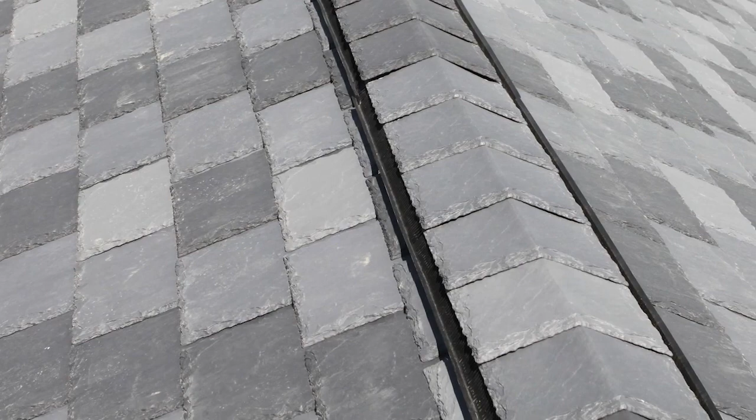For the contractor and installer, Aledora Slate has been designed and engineered to assure a fast and easy installation. By following these simple steps, you will provide a finished product that's not only beautiful, but also provides the home with the most durable protection available.

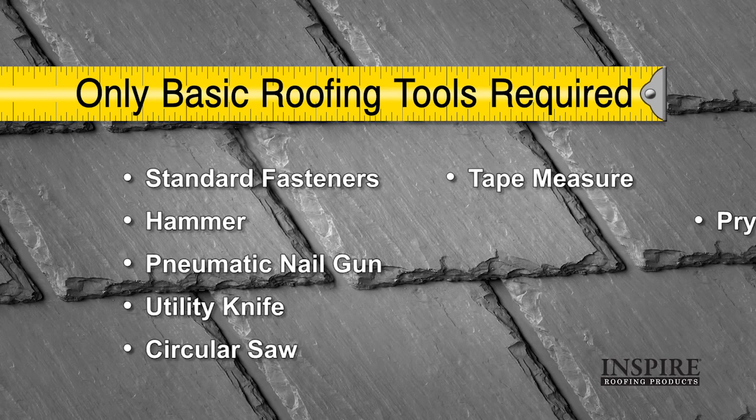Aledora Slate Roofing is installed using traditional roofing methods and tools. The slates can be fastened with hammer and nails or with pneumatic nail guns. They can be cut with a utility knife or a standard circular saw. You'll also need a tape measure, a pry bar, tin snips, and a chalk line. Note, only use blue chalk, never use red chalk.

Aledora Slate can be installed with exposures ranging from 6 inches to 8 inches on roof pitches of 5/12 and greater. For pitches of 3/12 to 5/12, 7 inches is the maximum exposure allowed.

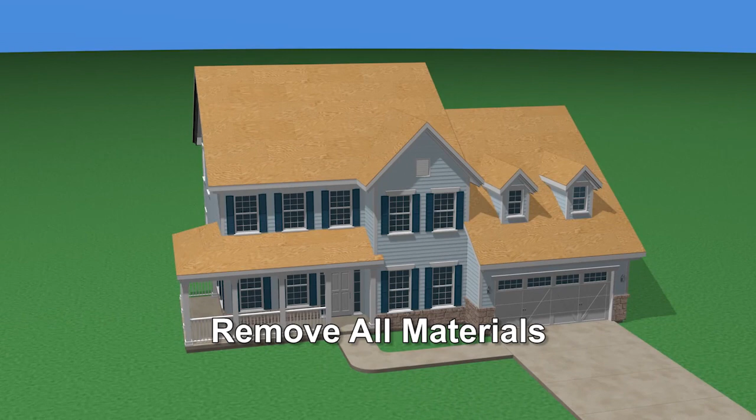Preparation. The roof substrate should be prepared as in any roofing job. Make sure that all previous roofing materials, if any, are removed down to the substrate. The area must be flat, smooth, sound, and clean.

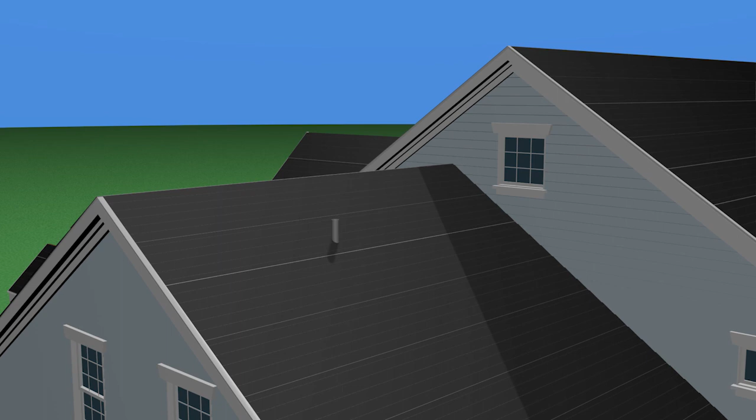Examine the roof sheathing, verifying that sheathing joints are supported by framing and blocking or by metal clips. Verify that the substrate is properly sloped for drainage, and proper provisions have been made for flashings and roof penetrations. All flashings and penetrations must be in place before installation of the slates.

The slates must be properly stored in their original packaging and kept in a storage facility where the temperature never drops below 20 degrees Fahrenheit. The slates must be properly stored on the job site.

Use protective coverage over all pallets while being temporarily stored on site, as the tiles have a cambered design to ensure that maximum pressure is applied to the leading edge when installed. So it's important to always store them on the original pallets and on a flat surface. Never double stack the pallets.

As with any roofing installation job, work should be performed in a safe, professional manner using all applicable safety practices and codes. Note that the slates can be slippery under certain conditions. Perform your work only when weather conditions permit. Slates may be installed in temperatures as low as 20 degrees Fahrenheit.

Install underlayment and flashing following the manufacturer's installation requirements and comply with all local building codes. Remember, Aledora Slate roofs last a very long time. Be sure to use building materials that last as long as the roofing tiles.

Nails should be stainless steel, hot-dipped galvanized, or copper. Flashings should be copper, aluminum, or steel. Use fasteners that are compatible with the metals in the roof so as to avoid stains from galvanic corrosion.

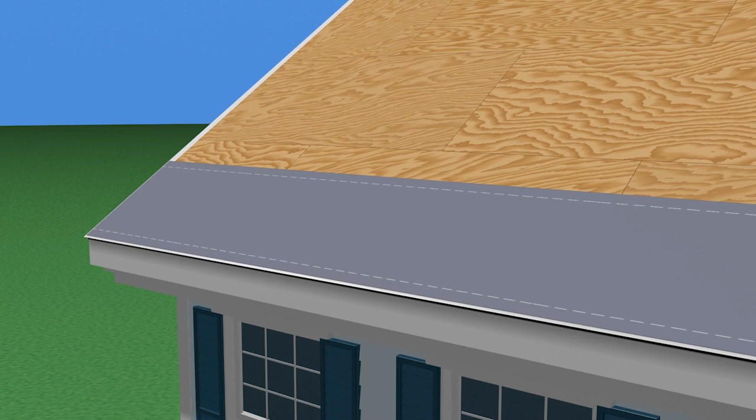Underlayment. In areas where the average winter temperature drops below 25 degrees Fahrenheit, a self-adhering ice and water barrier should be installed. The barrier should overlap the drip edge and metal flashings on the eave.

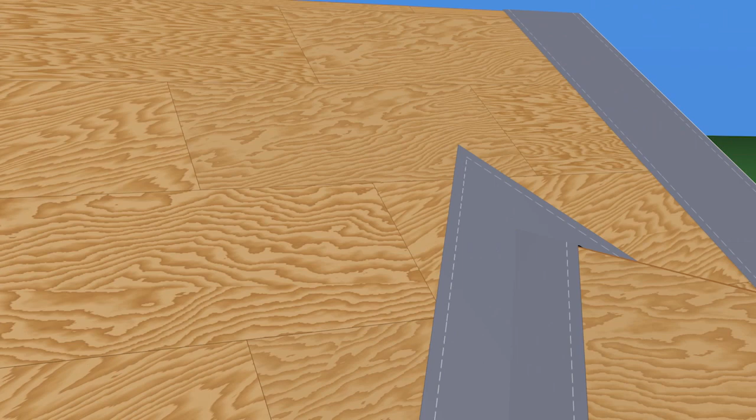It should extend a minimum of 24 inches beyond the interior wall and 36 inches for all valleys, rakes, and roof penetrations. Be sure to follow all manufacturer installation recommendations and observe your local building codes when installing the ice and water barrier.

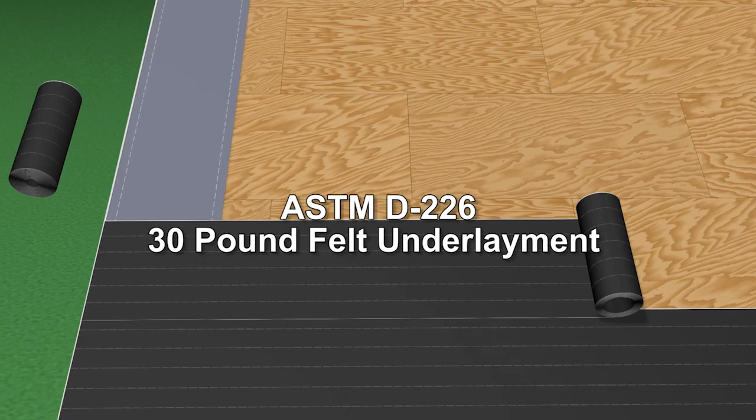Next, install a single layer of ASTM D226 30-pound felt underlayment on all parts of the roof deck not covered by the self-adhering ice and water barrier. Install the felt perpendicular to the roof slope in parallel courses. Top lap the edges of the felt over the ice and water barrier by at least 3 inches.

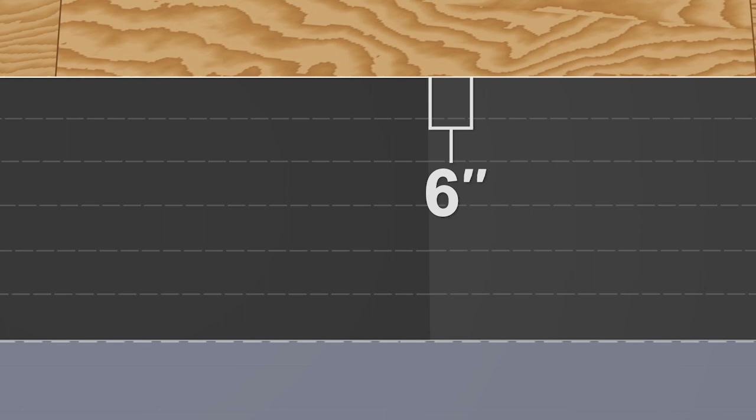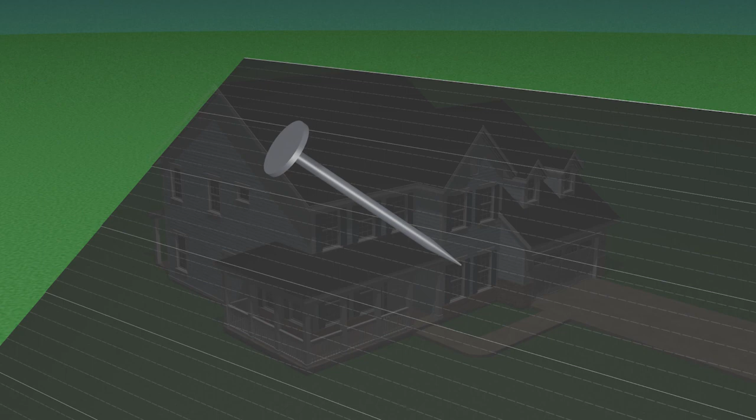Side lap the ends of the felt by at least 6 inches. Top lap each additional course of felt underlayment by 3 inches and side lap when needed by a minimum of 6 inches. Tack down the underlayment with the appropriate fasteners. When underlayment is applied to these standards, the roof will achieve a Class C fire rating.

If a Class A fire rating is desired, a single layer of MB Technology's Lay-Fast TU35 underlayment must be installed to cover the entire roof, following the manufacturer's instructions. Additional peel and stick underlayment should be applied according to local building codes prior to laying down the TU35.

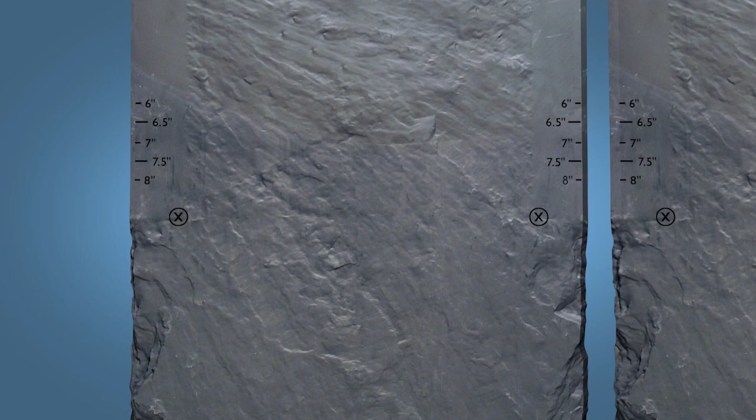Starter and first course. Aledora Slate tiles are fastened to the roof substrate with 2 nails. The nails must be placed in the 2 clearly marked spots or targets on each tile and must penetrate the roof decking by at least 3/4 of an inch.

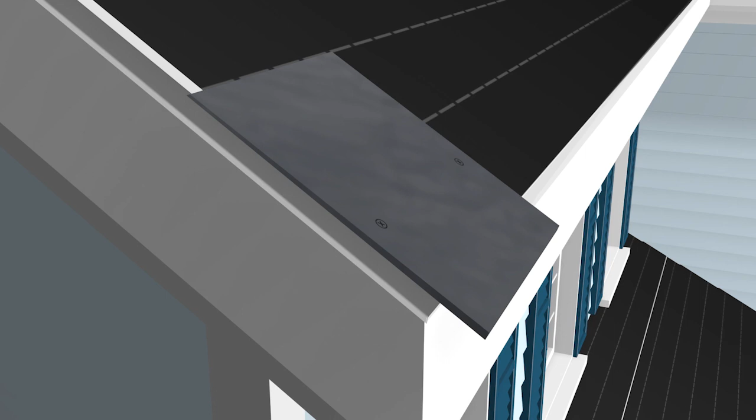Be sure to avoid over or under penetration of the fasteners. Improper fastening voids the warranty and can compromise the roof system. Start by placing the starter pieces so that they extend no more than 1 1/2 inches beyond the eave drip edge. Nail them in place, holding a gap between starter tiles of approximately 3/8 of an inch to 1/2 inch.

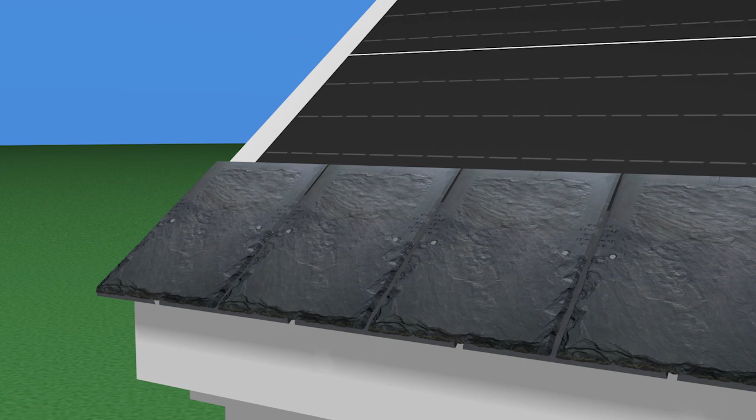Install the first course of slates, making sure that they are even with the butt edge of the starter course. The joints between the starter pieces and the first course should be a minimum of 2 inches, so that the nails are covered by the next course and that there are no through joints from roof surface to underlayment.

When the course reaches the opposite gable edge, cut the last tile vertically to achieve a width that will result in a straight finished edge. Cut the inside of the tile, that is, the side away from the roof edge, and then fasten it down, maintaining the gap spacing of 3/8 inch to 1/2 inch.

Straight courses. Aledora Slate tiles can be installed as straight courses or as staggered courses. If you desire straight courses, start by striking parallel horizontal chalk lines at the desired exposure level, beginning at the top of the first course of slates. These lines will be your guide to ensure that the slates are installed straight and uniformly.

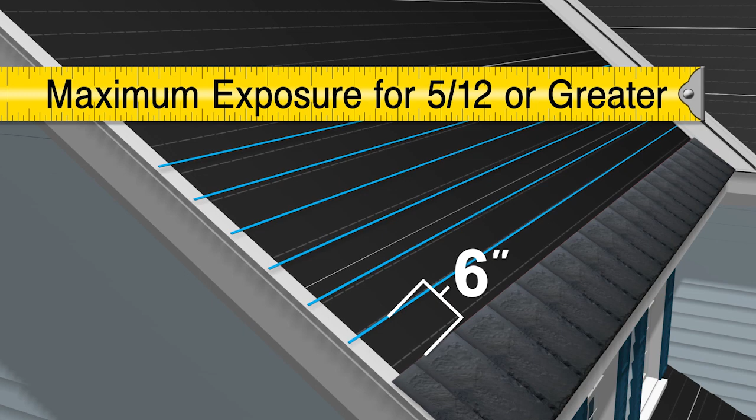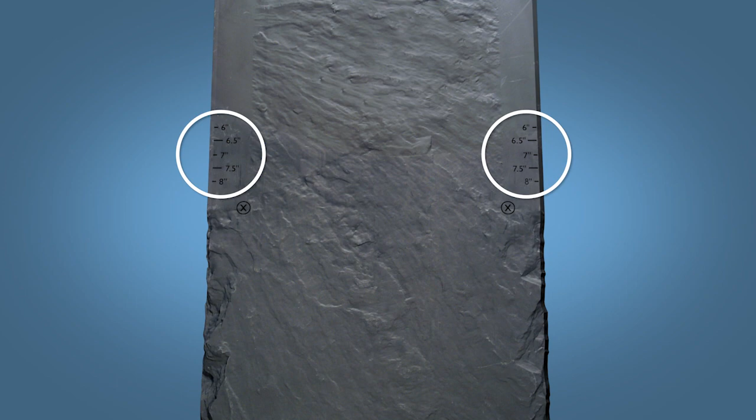Exposures can range from 6 inches to a maximum of 8 inches when installing straight courses on roof slopes greater than 5/12. 7-inch exposures must be used for slopes less than 5/12 down to a 3/12 pitch. Note that there are also 6, 6.5, 7, 7.5, and 8-inch exposure marks on each tile. When you place the marks on top of the previous tiles, you will also maintain the proper exposure. However, installing to a chalk line is the preferred method.

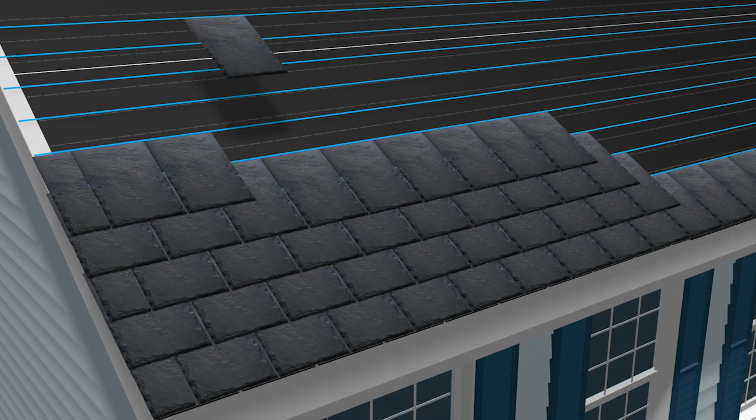Continue placing slates horizontally. Center each new slate by using the molded center mark located at the top of each tile to line up over the joint in the preceding course. Continue placing the courses vertically, starting each new course on the appropriate intervals.

Staggered courses. Aledora Slate tiles can also be installed in staggered courses. Lay down the starter pieces and first course just as you normally would. Strike parallel horizontal chalk lines at 7-inch intervals, beginning at the top of the first course of slates. These lines will be your guide to ensure that the slates are installed straight and uniformly.

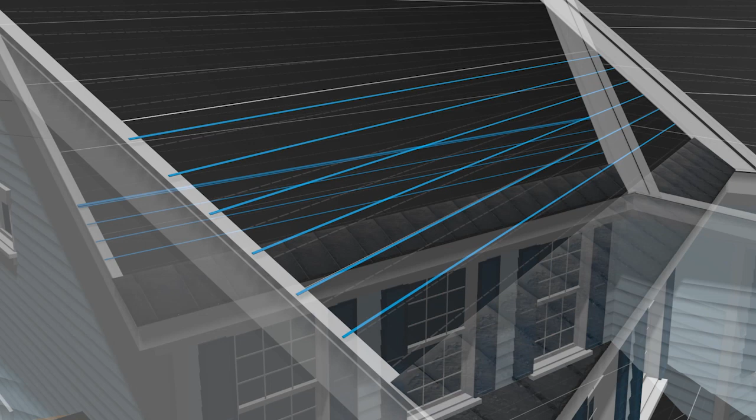7 inches is the maximum exposure when installing staggered courses on roof pitches greater than 5/12. 6 inches is the maximum exposure for roof pitches between 3/12 and 5/12. Now start the second course of slates. The top of the first slate in the second course should be placed on the chalk line. The next slate in the course should be placed 1 inch below the chalk line.

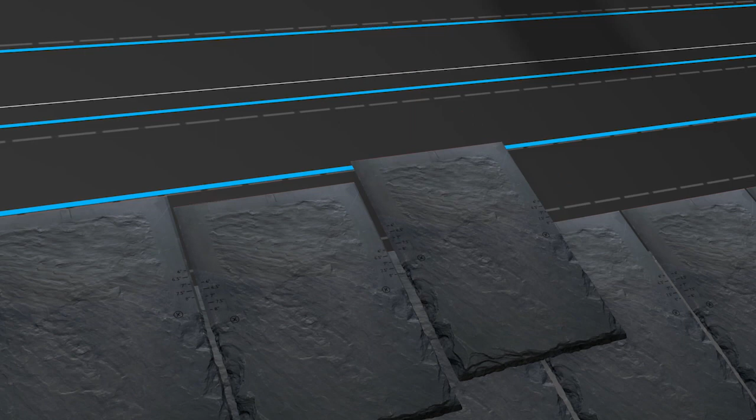Continue placing the slates horizontally, centering each new slate over the joint of the preceding course. Alternate the slates, placing one on the chalk mark and the next one 1 inch below the chalk mark. When the course reaches the opposite gable edge, cut the last tile vertically to achieve a width that will result in a straight finished edge. Cut the inside of the tile, that is, the side away from the roof edge. Continue placing slates vertically, aligning the top of each new slate with the next chalk line or 1 inch below the chalk line.

Valleys. There are two types of valley configuration you can use: open and closed. An open valley design may be appropriate if the roof is subject to snow, ice, and debris, as the wider spacing helps to keep the valley clear.

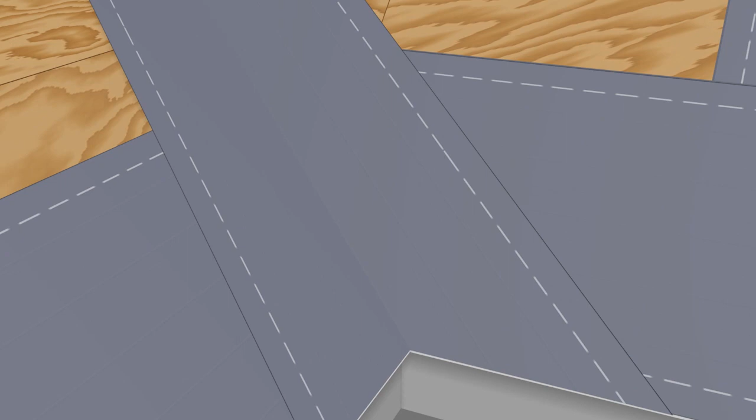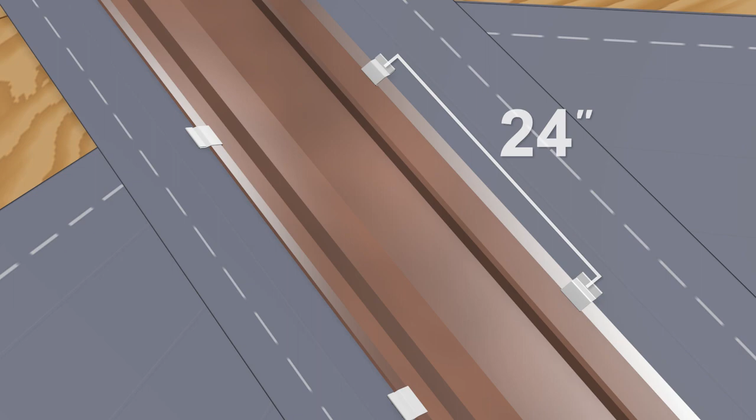If climatic conditions or building codes require it, install a full-length, 36-inch wide, self-adhering ice and water shield centered on the valley. When using an open valley design, a double W valley should be used. Install the valley flashing using metal cleats on 24-inch centers. Overlap the flashing by at least 8 inches and set the joints in sealant. The trimmed edges of each slate should extend 4 inches over the valley metal.

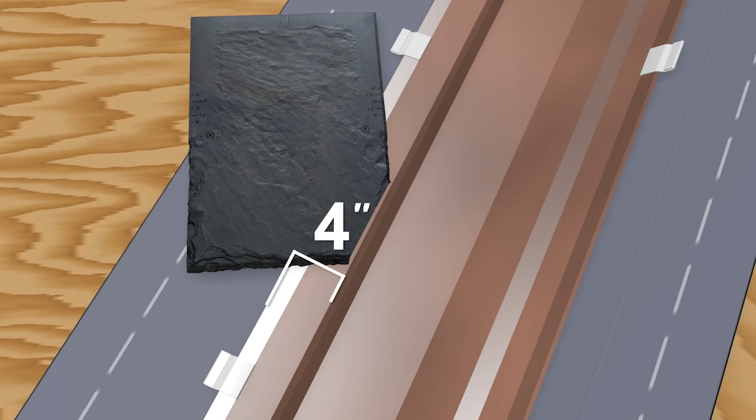They should butt up against the raised portion of the flashing, which will hide the structural ribbing on the bottom side of cut slates. When installing the slates over the valley flashing, be sure to avoid nailing through the underlying metal.

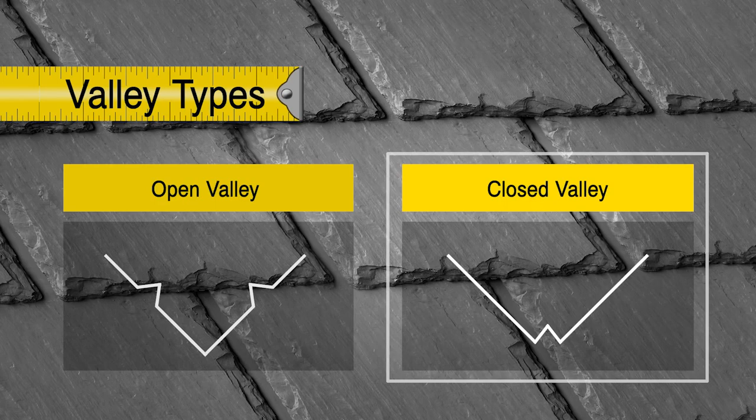If you use a closed valley design, a single diverter W flashing or a standing V-seam flashing should be used. Again, install a full-length, 36-inch wide self-adhering ice and water shield centered on the valley. Install the valley flashing using metal cleats on 24-inch centers. Overlap flashing sections by at least 8 inches and set the joints in sealant.

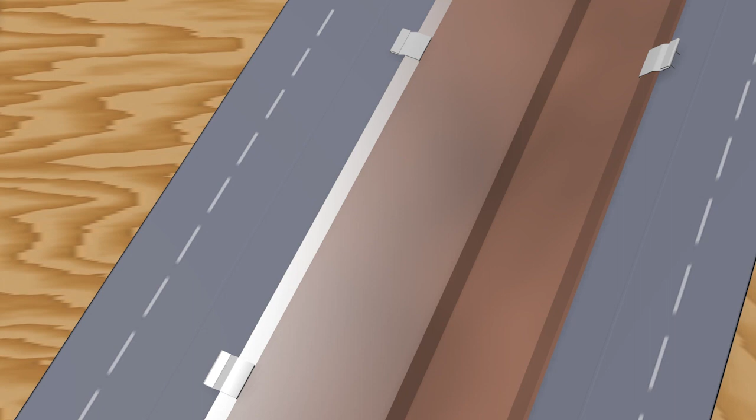The trimmed edges of each slate should extend over the valley metal. They should butt up against the raised portion of the flashing to hide the structural ribbing on the bottom side of cut tiles.

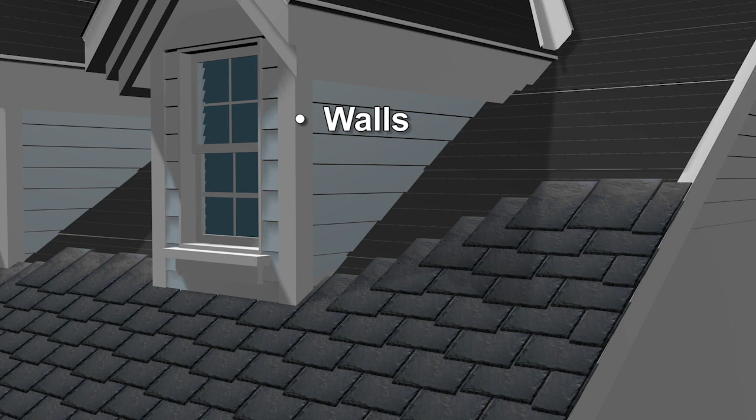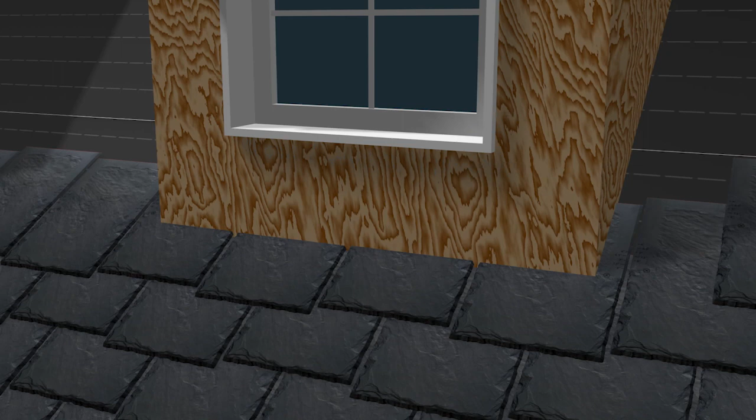Flashings. Flashings should be used around all roof penetrations, such as walls, chimneys, dormers, vent pipes, or skylights. Apron or wall-to-roof flashing is used when a roof terminates to a wall, causing a course to be cut and face-nailed. Place the horizontal part of the apron flashing over the top of the slates and fasten the vertical part of the flashing to the wall.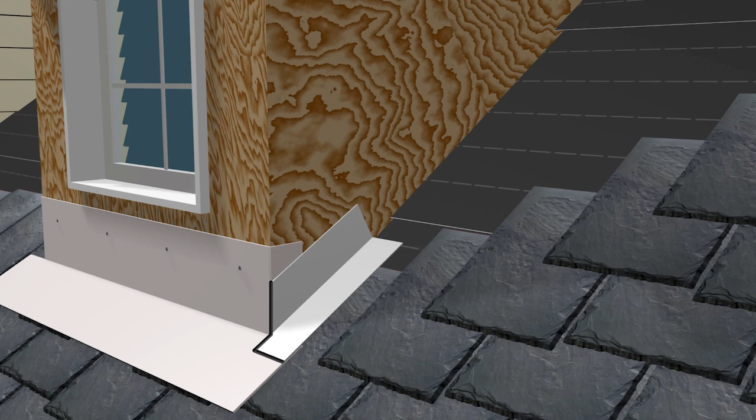It will be overlapped by the siding or counter cap flashing. The end of the apron flashing should extend beyond the wall and be finished off with a step flashing which is appropriately sealed at the corners. Step flashings should be used when a pitched roof comes into contact with a vertical wall. Individual pieces of metal flashing should be installed at the end of each slate to prevent water intrusion. They should extend under the uppermost row of the roof slate.

The vertical leg of the metal should be turned up a minimum of 4 inches and extend 4 inches on the slate with an optional 3/4 inch hem. Step flashings should have a minimum length of 10 inches and must overlap a minimum of 2 inches.

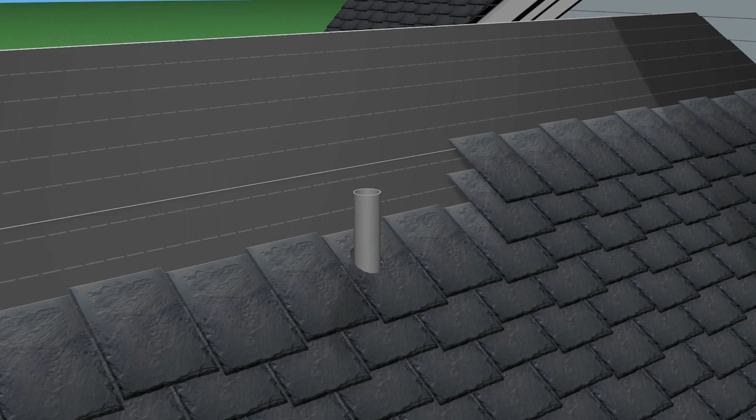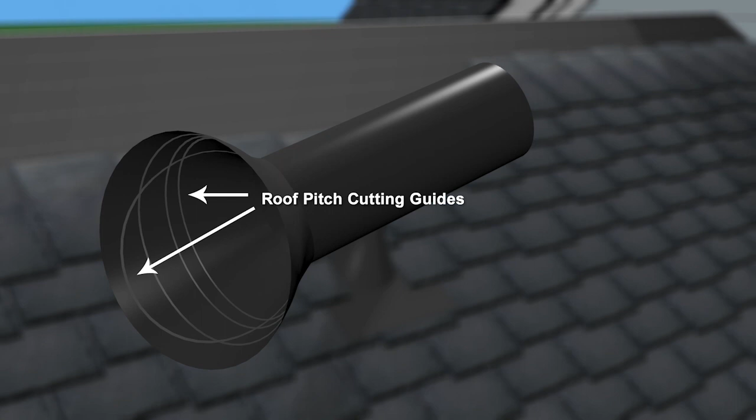Penetrations through the roof deck, such as vents or pipes, require a flat flange around the penetration. The flashing should be placed above the penetration and overlap the lower course of slates. Capmaster decorative vent stack covers can be added to cover the vent or pipe. The bottom flange of the stack cap is marked with lines that indicate where to trim so as to match the roof pitch.

Hips and ridges. Aledora preformed slate pieces are used to finish off hips and ridges. Start by chalking a straight line. Place one piece of preformed hip and ridge slate at the eave and one near the peak to act as guides to mark the beginning and end of the line. Snap the chalk line at the edge of the slate on the top and bottom pieces. This will help keep the hips straight in the event of a crooked underlying structure.

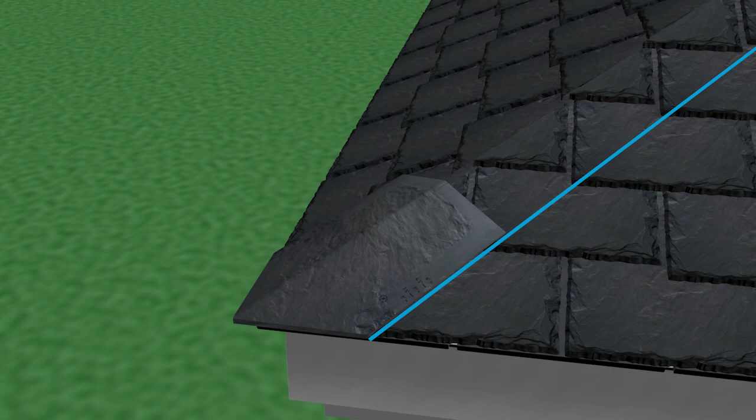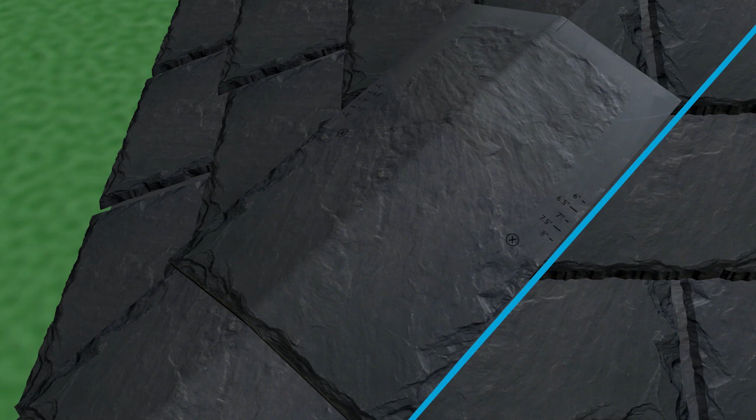Install the preformed hip slates from the eave to the peak using a maximum exposure of 8 inches. Fasten the hip slates with 2 fasteners, one on each side, nailing in the designated target area. The fasteners must penetrate the deck by a minimum of 3/4 of an inch.

Ridge vents. 1 square foot of net-free area is required for every 300 square feet of attic floor space for a balanced ventilation system split between the ridge and soffit. 1 square foot of ventilation for every 150 square feet of attic floor space is required if this balance cannot be achieved. Ventilation is necessary for the extended life of the roof system. An unvented roof or improperly vented roof will void the warranty of the Aledora Slate roof system.

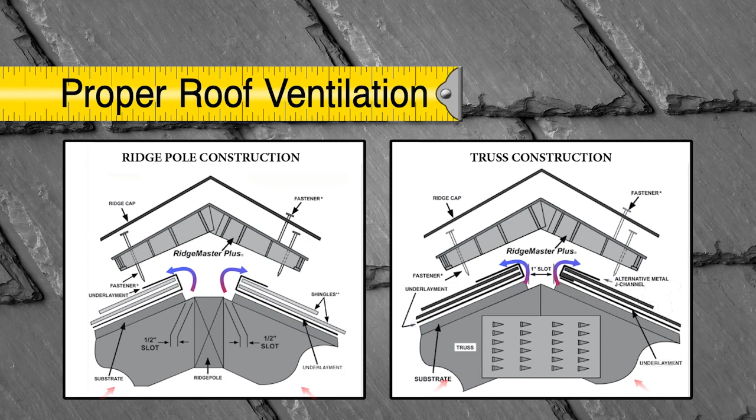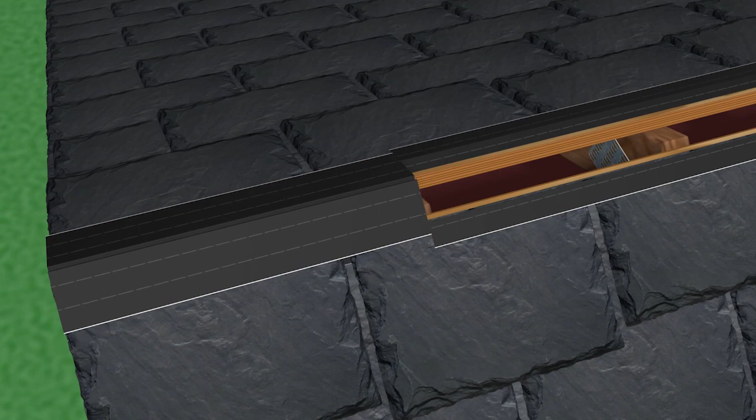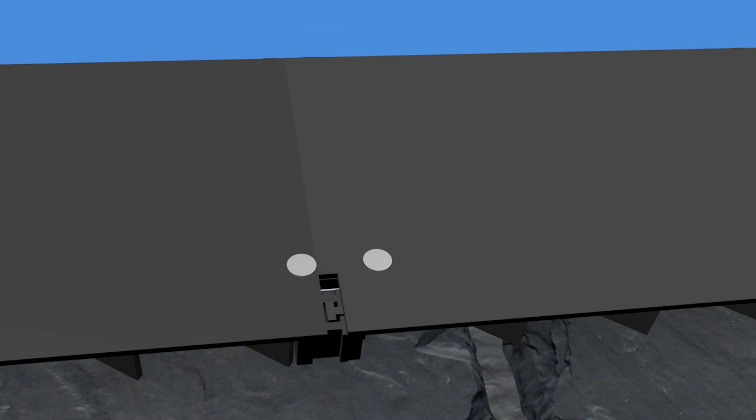Ridgemaster Plus ridge vents can be used on either ridgepole construction roofs or truss construction roofs. In either case, start at one end of the ridge and install each section of the vent, with the embossed arrows pointing in the direction of assembly. Each new section clips into place with the preceding sections. Use 3-inch roofing nails to fasten the vent through the top course and into the roof substrate. The nails should be placed through the pre-existing holes along the outside edges of the vent.

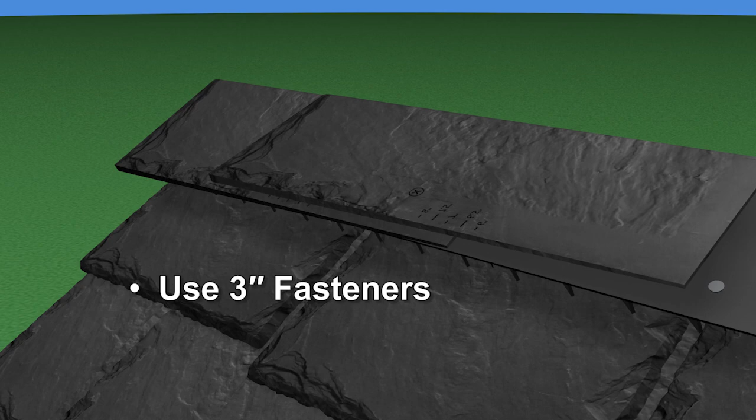Finally, install the preformed ridge slates along the top of the vent. Push the preformed slate piece down to conform to the profile of the roof line and vent. Use 3-inch roofing nails and nail through the pre-marked target on the slates. The nails must penetrate the roof substrate by at least 3/4 of an inch.